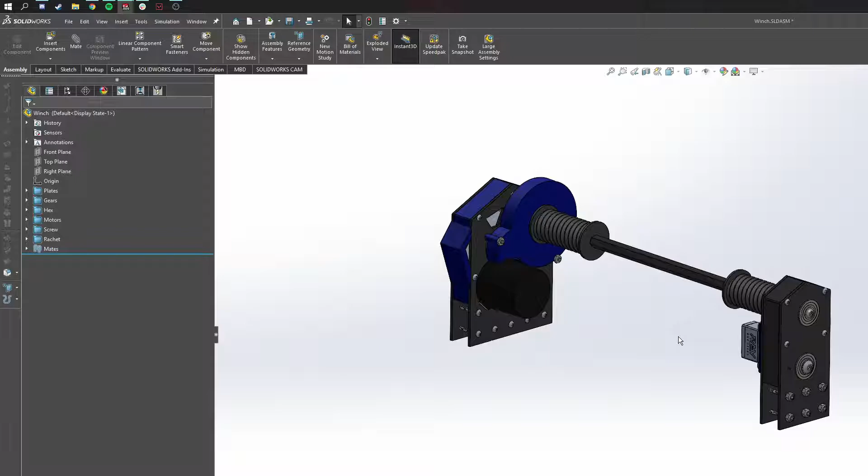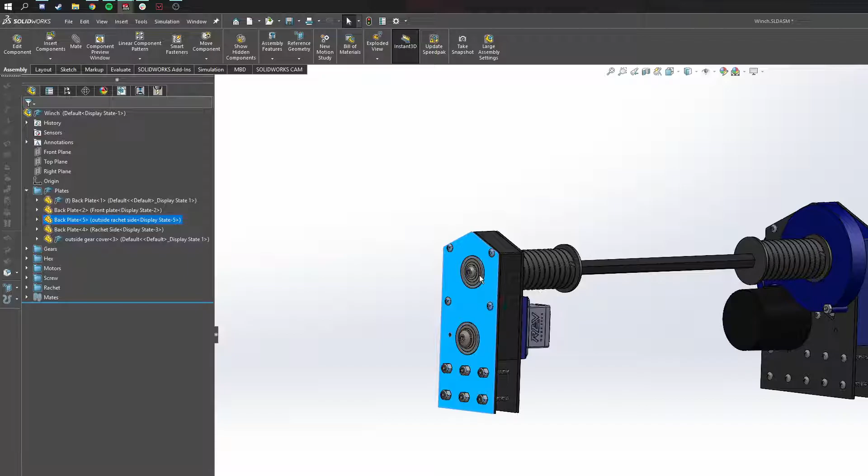So, this is an off-season CAD I was working on this off-season, and I actually use configurations for all four of these plates. So, this plate, this inside plate, this one, and also this one. So, if I open this part, and then it usually opens this screen.

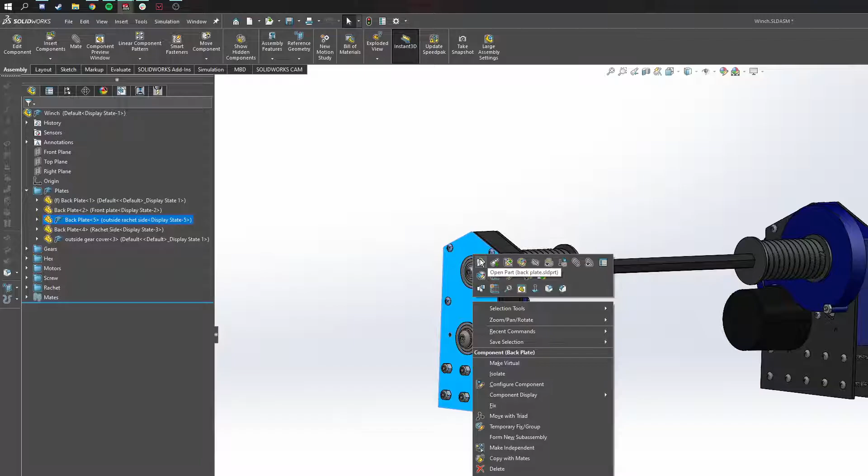So I'm going to click over to my configuration manager, and now you can see this is the part I clicked on when I opened. I clicked on this one, I think, and then I hit open part, and then it opened into this. So this is your configuration manager. This is where all your different configurations are stored.

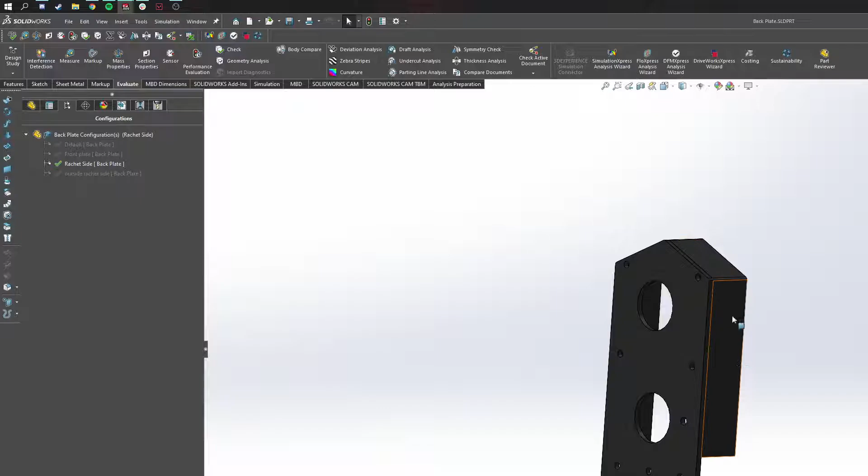So for example, if I click this one, this is that one plate with my gear cover. Then you can see the opposite side of that. Then you can see the opposite side of this with the gear cover on it. So I'm going to actually start from scratch, and then we can see how to set up configurations.

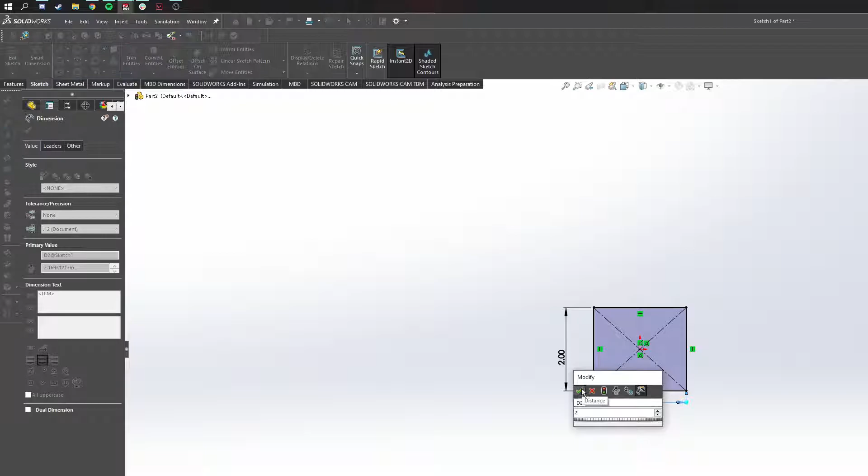So I think I'm just going to make a box here, and then I'm going to smart dimension it so it's a cube. Alright, we got a basic box. So for example, if I wanted a hole in one part, but then in another part I didn't want a hole.

So the first thing I'm going to do here is I'm going to go to my configuration manager, and I'm going to right click on this, and I'm going to say add configuration. So now we're going to name it, so box with hole. So now you can see, like in my other part, we have two different configurations now. We have this, the default, and we have box with hole.

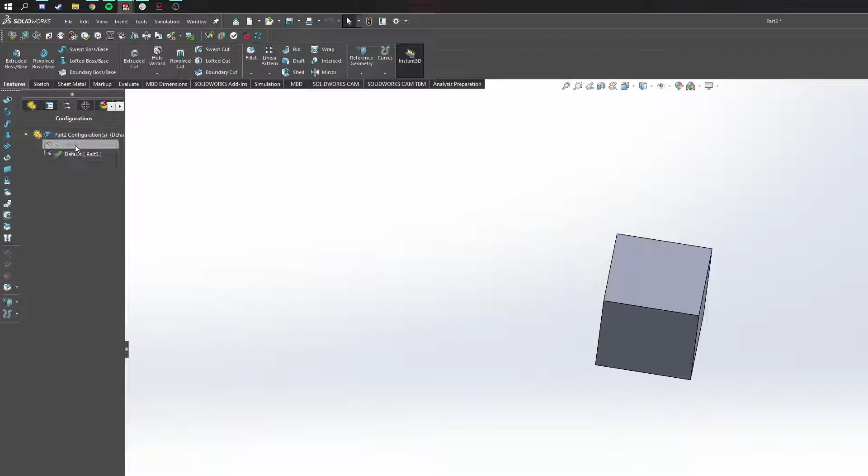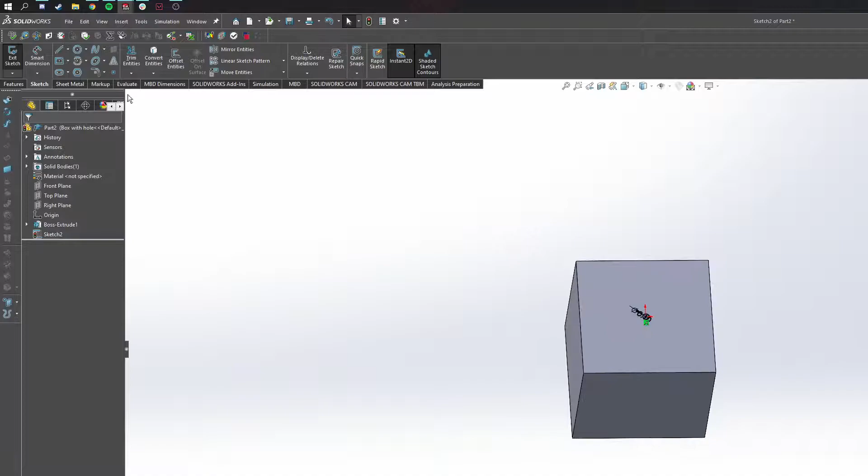So you can see there's actually not a hole yet because we actually need to add it. So I'm just going to sketch here and put a hole. Can make it about, I don't know, an inch or 1/10 of an inch. So now we're actually going to go to cut extrude, and then we're going to hit check. So now this doesn't have a hole, then box with hole.

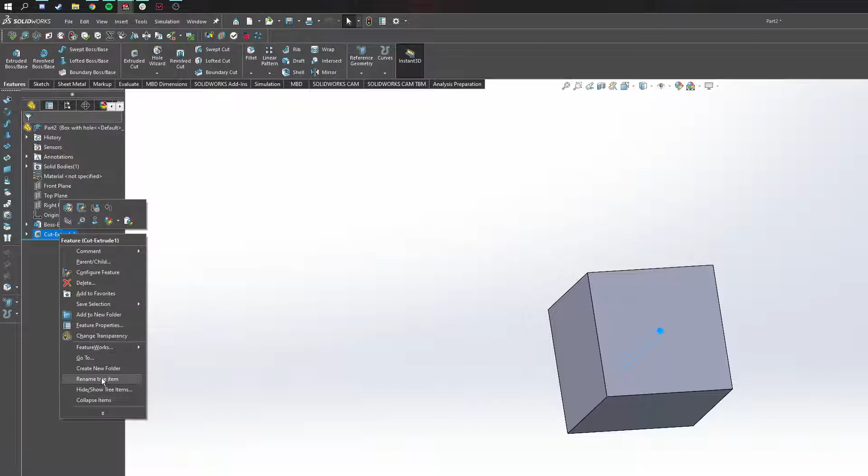So if you actually wanted to change this, we can go here, we can click on the cut extrude, then we can go to, where is it, configure feature. So this is just some random Solidworks error.

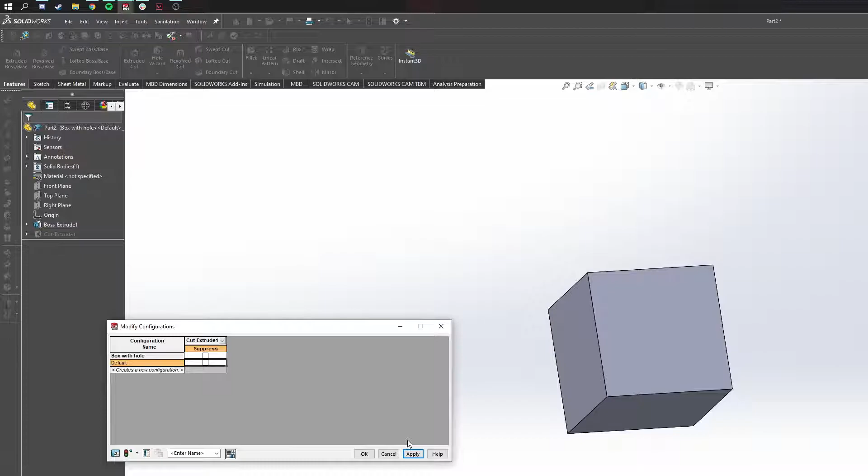So you can see here, if we wanted, for example, the box with a hole, like later on we'd be like, oh, I want to change this, I don't want a hole here, I want a hole somewhere else, but you don't want to delete the feature, you can hit suppress and apply, and then it'll go away. But if you want, for example, both of your configurations to have the hole, you just unsuppress it on both and then hit OK, and now both configurations have the hole.

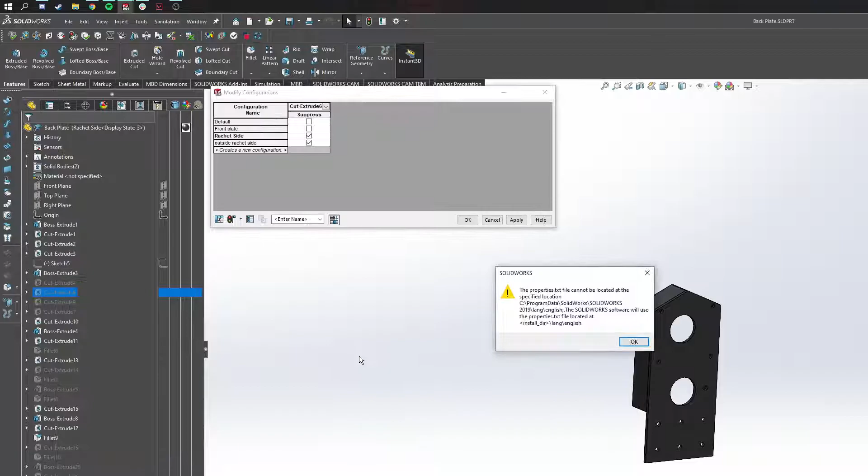So this is obviously a really simplified example. So now, for example, these are all the features I have. So if I go to configure feature here, you can see I have 4 of them, and only 2 of my configurations actually have them, and these 2 don't. So it's really just practice and getting more efficient with your configurations.